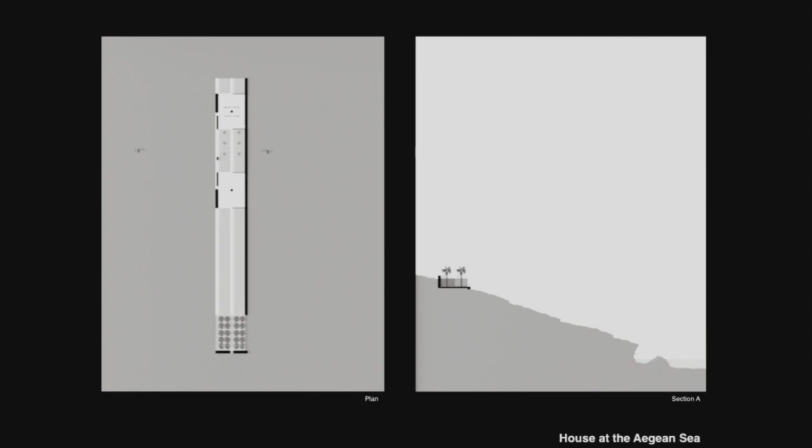You see here the entrance with the wall on the right-hand side and the stripe in the middle. Same in the other direction. The porticos, where you see this line of light along the terrace. In daytime it's white, then it gets yellow, and in the evening it gets red.

Geometry of the Greek light. The living room and the column in the living room, and the marble stripe on which it is put.

This is the porticos with what we call our television, because we don't have a television. This here is our television.

And here you look to the porticos and the wall in the living room, and you see it's a closed wall. It has just a small slit for a window. But look what the light is doing to it, what jokes. You see a continuous sea line inside.

One thing which is important: this house is created as a unity, so it has one architectural order. And I find this a difficult thing if you build a house on a hill and you push it into the hill. You have the problem of having on one side 1 floor, on the other side you have 2 floors.

And you have a mess of the order, which you cannot resolve. So I decided to move the house away from the hill, to build a wall, to have a water basin on top, and the water falls down and goes into the next basin, so that this wall with the water and the reflections of this reflecting pool is the facade, the back facade of the lower house. This is important. This was a big issue of discussion always between Livio and me.

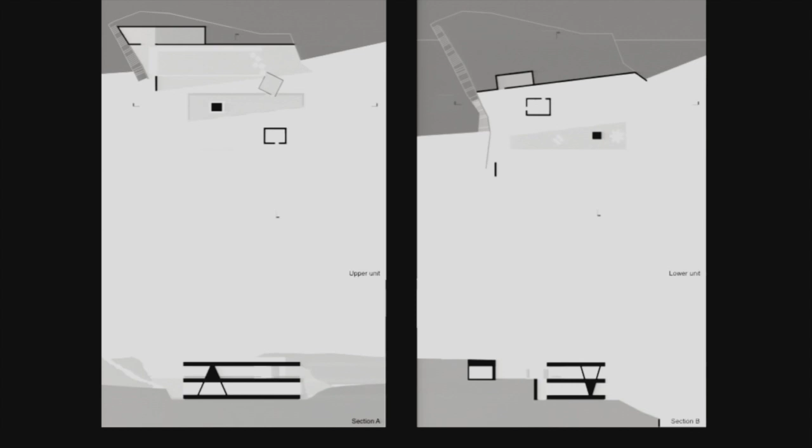See the house with the 2 columns. You see the house is set off by the wall. So this is the wall, this is the reflecting pool, the house. So you have to get over in a kind of a bridge, in a kind of a box, which is completely closed to all sides. You see only the sky when you are in here. But when you are at the point where you can enter the house, you see through the whole house. You have this change of vertical and horizontal opening.

This is the access under a pergola of Japanese wisteria, which are beautiful. In the back there is a whole hedge, or I don't know, of jasmine. So when you get into the house, you have the impression you're in an oriental garden, 1001 nights, because the perfumes of the flowers is so strong. You get the water, you get water lilies, and you have the house.

This is the house from the bottom. You see the duality, and you see the column. One column, the other one is inside, and outside upstairs then. The porticos on the upper floor with the bench. All concrete, I think I don't have to say that. One can see it. The view to the porticos and the column and the garden.

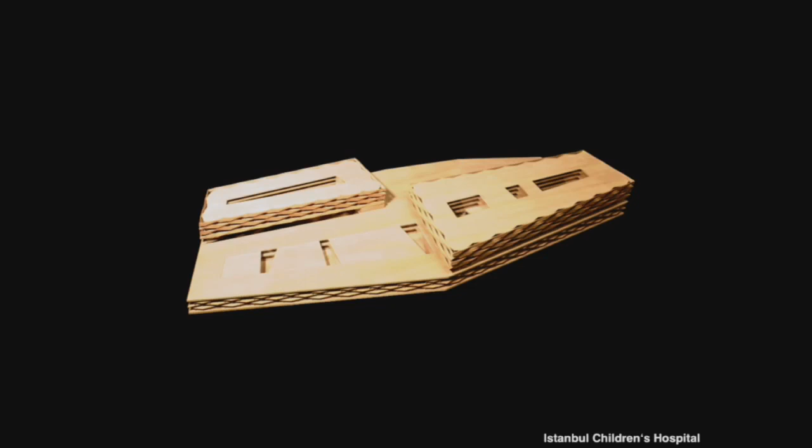You see here the model of it. You see the plinths - in the plinths we have the treatment areas, and then this is what I called the two houses, this and this. And of course the terrace needs courtyards all over to bring the light downstairs.

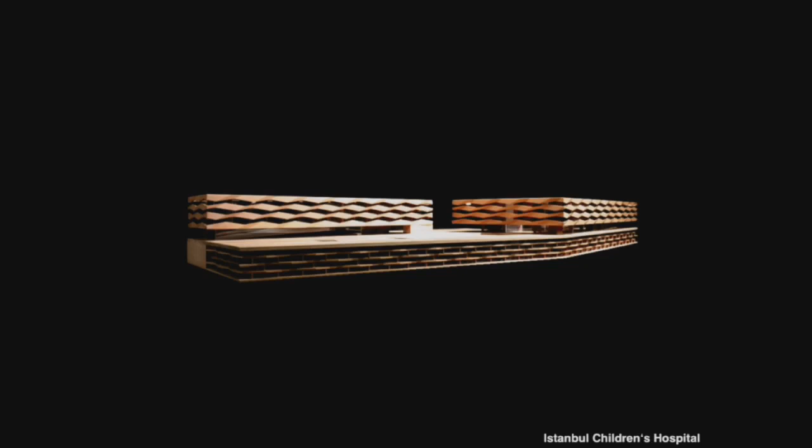We developed a facade that is important for protection from the sun. You get very hot sun in summertime and very rough winds in wintertime. So we had terraces in front of the rooms for two reasons: for this protection, and also to create more surface for the family to be outside and able to stay.

We used separate diagonal elements, slightly shifted between themselves to create this kind of pattern. They are repeated but diagonally organized, so it's always the same element, but diagonally shifted, giving you this continuous wave pattern.

The same idea is used on the lower floors, but it's tilted and horizontal. You need more depth for sun protection because you don't have a balcony, but you have circulation in the back of this area. In the back of the balustrades you get some zenithal light, creating spatial continuity between floors and bringing light into the depths of the deep rooms.

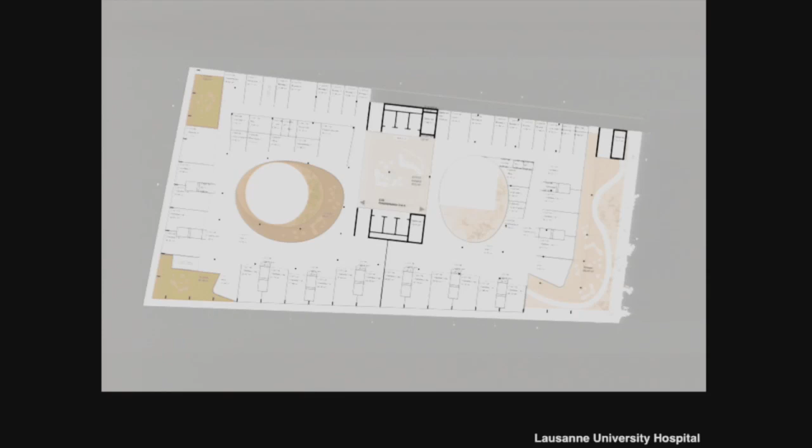This interior courtyard could look this way. You see these are not corridors, but spaces. Another part is near the desk, so supervision is guaranteed.

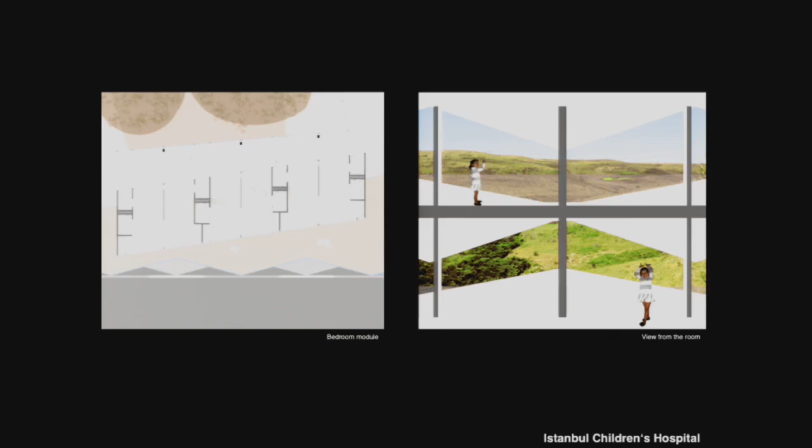And these are the rooms of Istanbul. It's always a double room with bathrooms on each side, one room for the child and the other for the family. In daytime you can open it up and get a whole apartment, with a personal terrace in front of the room and a view to the interior courtyard, so the child will not feel isolated.

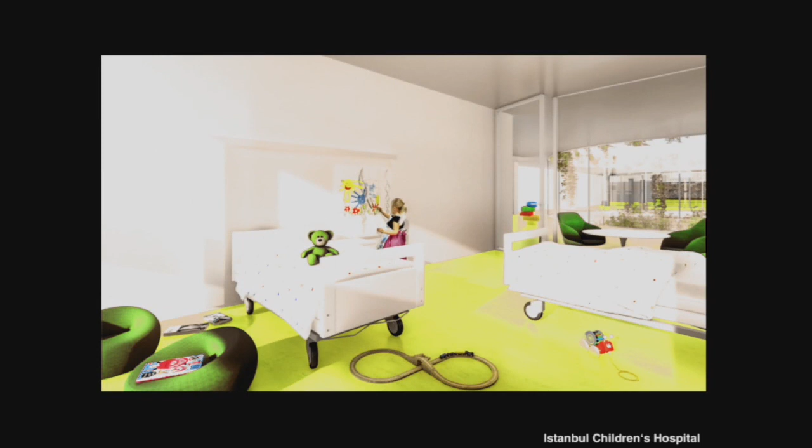This is the view to the terrace, and the view from the room to the inside, to the interior courtyard and the play areas. I think this is really a children's hospital.

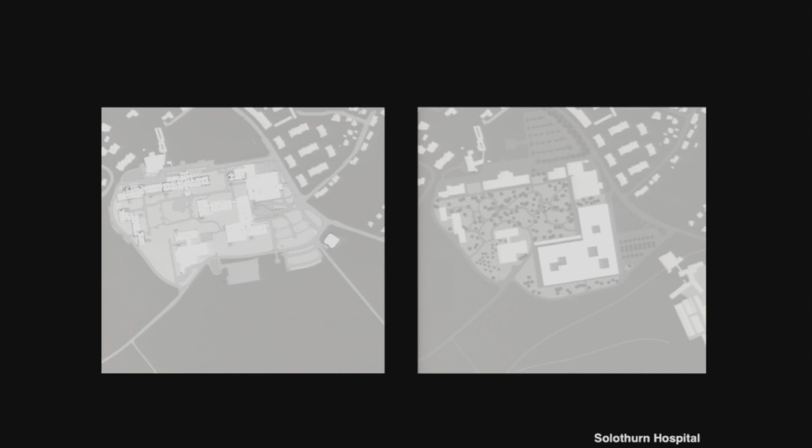Now I get to the second hospital. This is not built either, but we are going to start building at the end of the year. It was an international competition which we won, and it is a substitution for the existing hospital, which is here. We have to substitute it with this building, meant to be a frame around which can grow on both sides, with these old buildings that we leave. Once the existing hospital is pulled down, because they move into this building, we will have a big park for the hospital.

As a typology, we have been inspired by the Mezquita de Cordoba, which in this plan dates from the phase of 961. It shows that it is expandable, it can grow, it can change, it is flexible, and actually many changes have been made to this mezquita over the later years.

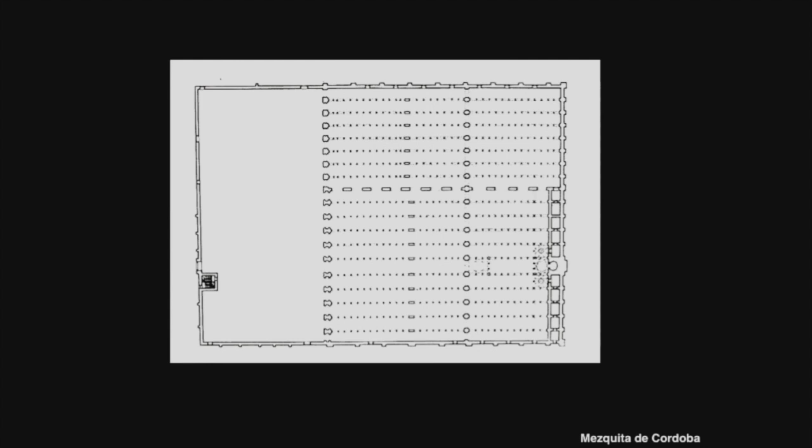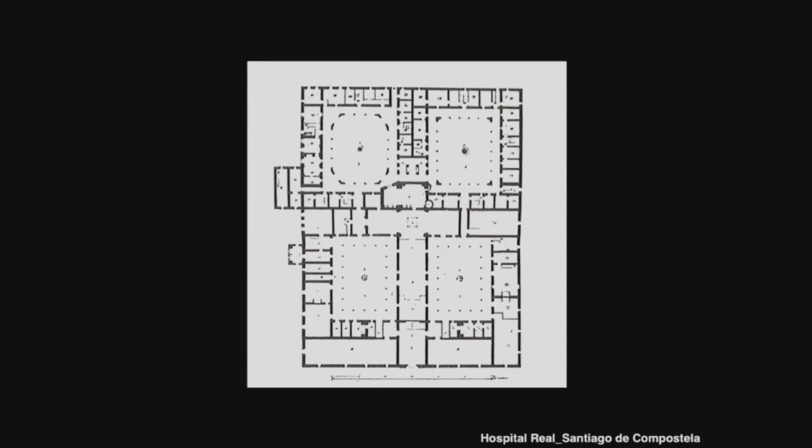We use that mezquita typology for the treatment areas, while for the nursing areas we use a monastery typology, which is a concentric organization of rooms organized around interior courtyards, or a kind of cloister. This one is the Hospital Real de Santiago de Compostela, which has a church in the middle, from the 16th century.

Here you see the same thing in color. When the patient comes in, he finds always a desk in these points and a waiting area near the interior courtyard. So light is always guiding him through the whole hospital, and he can find his way very easily.

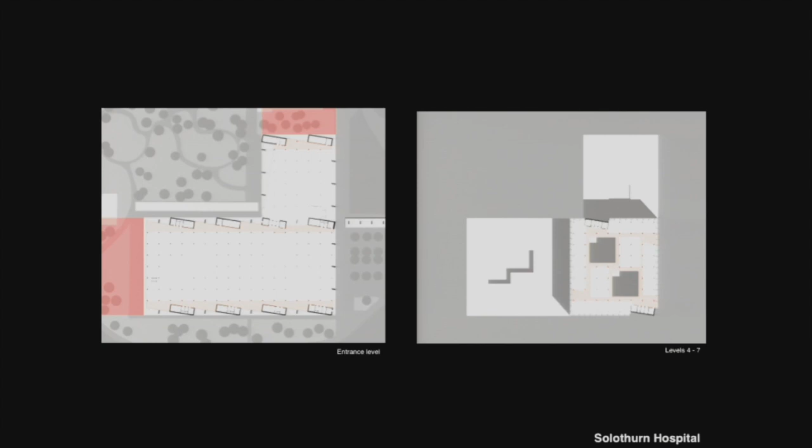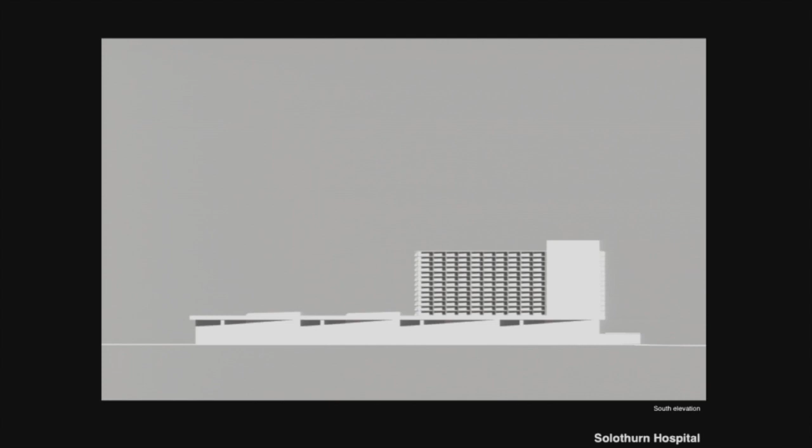The other typology on top. A facade which demonstrates that in the lower part you have the circulation areas which are of a bigger scale, and in the upper floors you have the patient rooms that give a smaller scale to the facade, with the sun screens. But even so, we are searching the unity to unite the two things together into one whole thing.

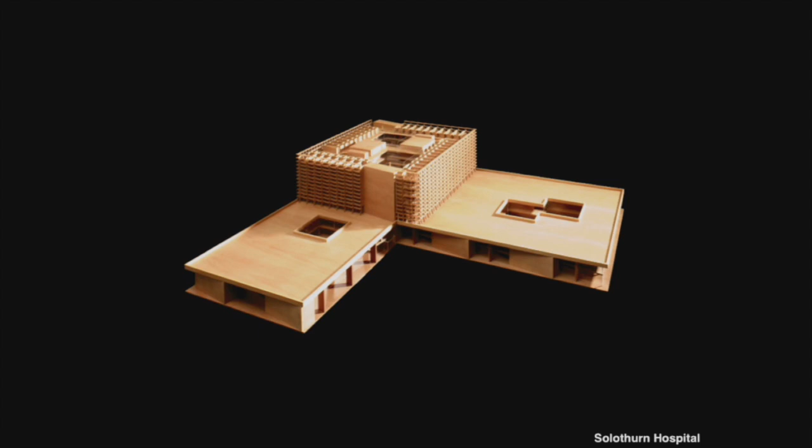And the terraces here, the roofs, will be big garden terraces which we are designing at the moment. They will have access on both sides. They will have niches where you can sit, and they will have plants and flowers and shrubs and trees. This terrace is more for the patients, and this one is more for the professionals. And on the first floor terrace we have the obstetrics, so they have their own garden for their use.

This is a very old drawing from the competition, but it shows a bit the atmosphere in this main circulation for the patients. You always have the park on your right-hand side, lots of light, and you find the places where you have to address yourself for the different treatments you need.

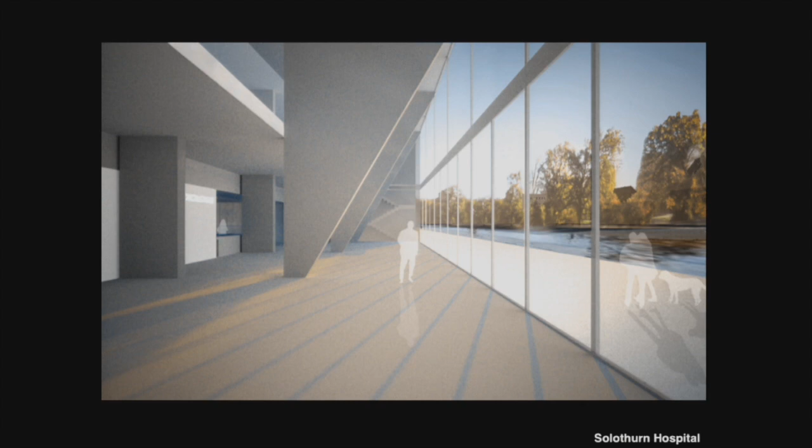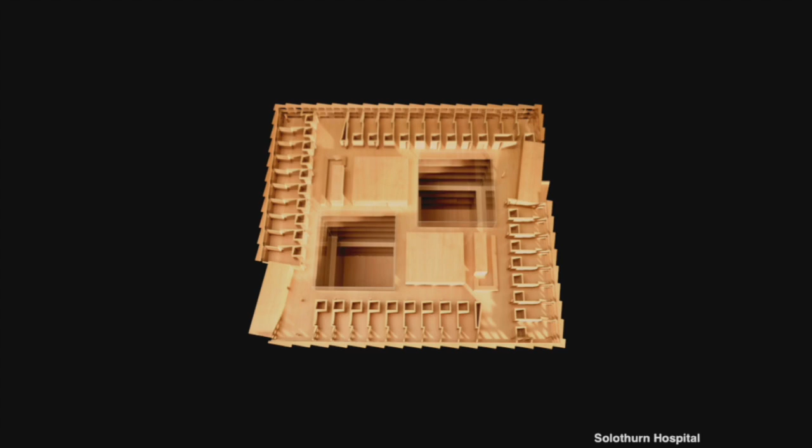And this is the plan of the nursing units. You see the rooms organized on all four sides. They have a beautiful view to the Jura, which is the mountain that goes east-west. And you have these two different views: one is to the outside, one is to the inside with the courtyards that will have vertical gardens, and then the nursing units are placed in a way to be near to everything. So it's a very efficient plan.

Usually in bedrooms in hospitals, if you have two beds, one bed is near the window and the other bed is behind it. So the second bed is a second-class bed, even if they're both in the same class. The second bed looks only at the first bed and the feet of the first patient. And if you have to close the curtain because somebody wants a bit more privacy, you have nothing. You're like in a cubicle, in a closed box.

We always put the beds on a right angle or opposite, depending on the situation we have, in order for both to have a view to the window which is unobstructed. Both have their private room, and together they have a common room that serves like a table, a chair to sit near the window.

So let's see what comes next. Yeah, this is the facade we are developing now. It's a facade, as I said before, the light needs steps to be transformed, and to bring the light, if you have big windows, you have to transform the light into a softer light, because you don't want the glare, you don't want the heat from the sun. So we are developing an element that is in front, and we are thinking at the moment of a very light concrete element, very thin, maybe with fiberglass, or we are still working on this.

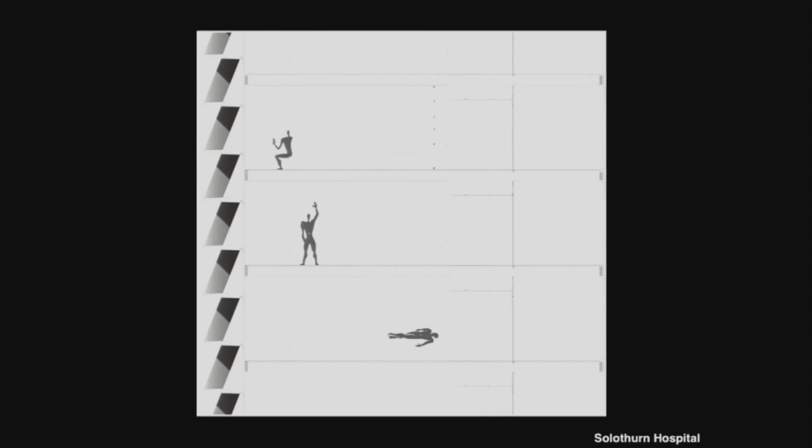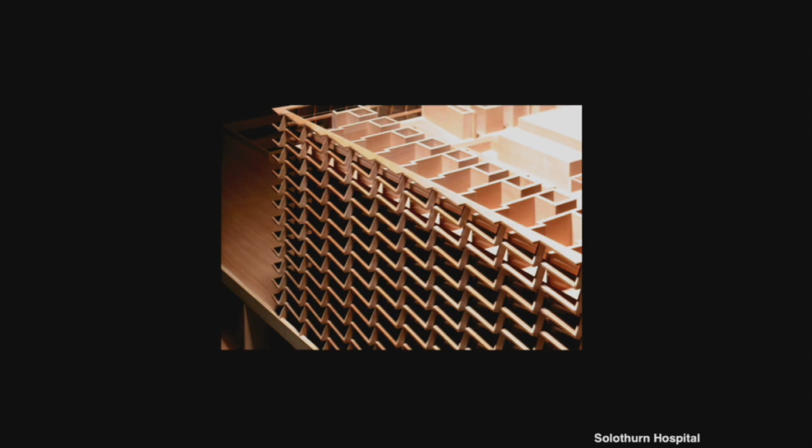And this will be arranged with horizontals. One is at the height of the table, and one is above the height of the eyes. So when you stand, when you sit, and when you lie, you have the full view to the outside. Here are the first trials for these elements that are repetitive around.

And since this building is not yet built, I show you just a few pictures of built hospitals we have done, in order to show you what I mean when I say a corridor must be full of light. It must guide you and give you orientation through the hospital.

It needs space. Here you have a corridor in front of the doctor's room in the Basel Hospital, and the same corridor one floor up in the operation rooms. You never get dark rooms in our hospitals, dark corridors. That just doesn't exist. You're always in the light, and you always have a certain view.

This is the same corridor in the obstetrics department, where the husband and wife are maybe waiting to be prepared for the delivery. So you have chairs for relaxation, coffee tables and so on, and you can stay in a good atmosphere.

Little waiting areas near elevators. These are the desks where you have to announce yourself, also with zenith light if you don't have a side light.

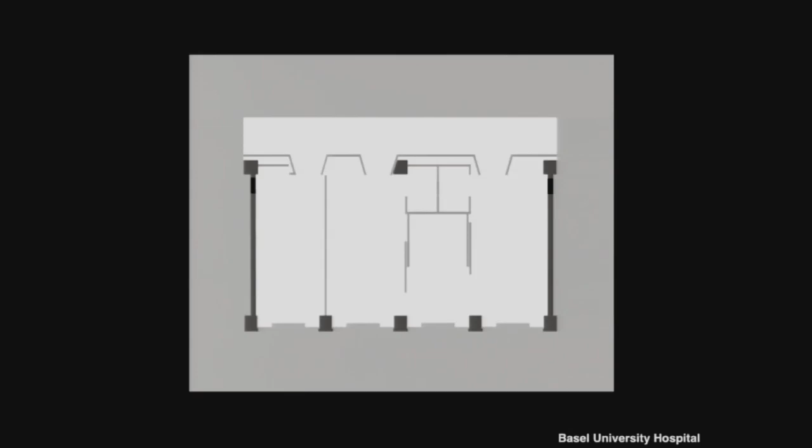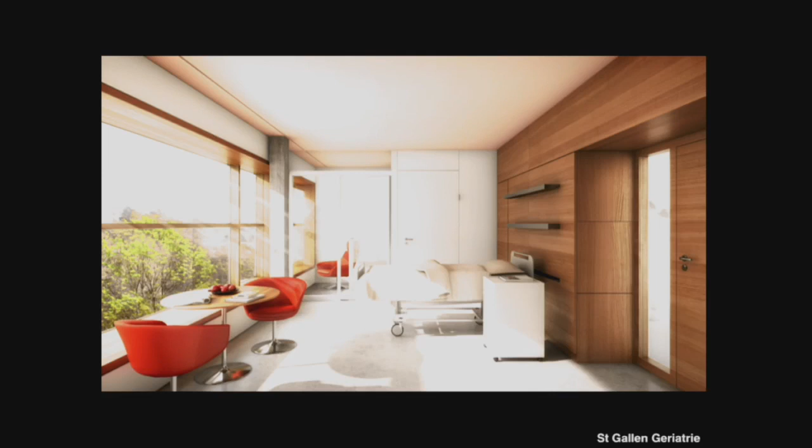This is the middle part, and it's very flexible because you can close one door, then you have a one-bedroom on one side and the suite on the other side, or you can adjust it a bit depending on the need. This is a simple room, and this again is a one-bedroom with a little terrace in the back.

See here the two windows. This is the last building I'm going to show you: the Institute for Pathology and Forensic Medicine in St. Gallen. It's a laboratory building, and this building illustrates our belief in the principle of unity.

The theme is similarity versus variety, unity versus contrast, rhythm and light. I should like to call to mind Igor Stravinsky and his lectures at Harvard in '39, titled Poetics of Music in the Form of 6 Lessons. I quote from his second lecture, The Phenomenon of Music.

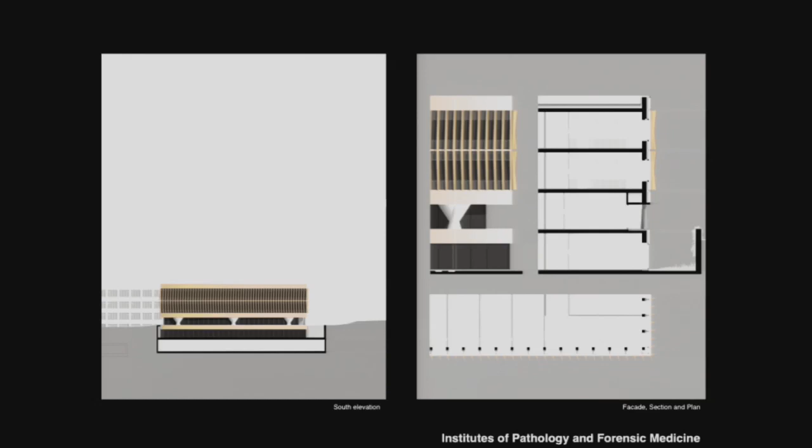The building, as it presents, I said similarity and variety. This facade is made in a way that inside you have a simple glass facade, and then you must imagine you put a box of metal, aluminium, around the whole building. You put it in a box, take a knife, and make a slit from top to bottom in a slightly diagonal way, and fold out the two elements.

And this is repeated all around the building. It gets this facade, which is highly effective, because the parts are not the same. The top parts are bigger than the bottom parts, then the middle part, and then again the bottom part.

We made a lot of studies in the studio, and then our technicians were calculating it. We put it to the laboratories in Rosenheim at the EMPA to have it tested, and it has proved to be an extremely efficient, energetically efficient facade. We got the first eco-label in Switzerland for a laboratory.

So it's not only, I think, quite nice, but it works also. You see what the light is doing with it. It's always different every day, even the color changes.